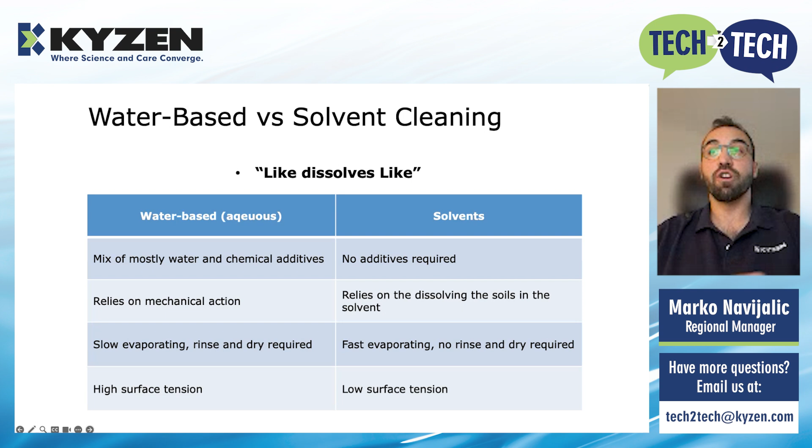Aqueous products are also much slower at evaporating. This means that your solvent process, in most cases, will eliminate the need for a thorough rinse and drying process after the cleaning, which are always a big part of the water-based cleaning process. And a very important property of solvents is that they have a much lower surface tension. This enables them to much more easily penetrate into small crevices and gaps, making them very useful in cleaning very complex products with small pitches and very low stand-off heights.

Because solvents are much more effective and rely mostly on chemically dissolving your soils, all the other factors like time, temperature, and mechanical energy will be of much less significance than in a water-based process. This will in turn result in a much faster and simpler process, and because saving time and money is your goal, that is what you want.

Stencil printing is a critical step in the electronic assembly process, and it has been reported that around 64%, or sometimes even up to 80%, of the defects in the electronic assembly process are caused by the stencil printing process. That's the reason why under-stencil wiping has gained increased interest over the last several years. Here you can see typical steps for this process. I won't go into much detail. For this, I would highly suggest you check out our other Tech to Tech series, specifically on under-stencil cleaning.

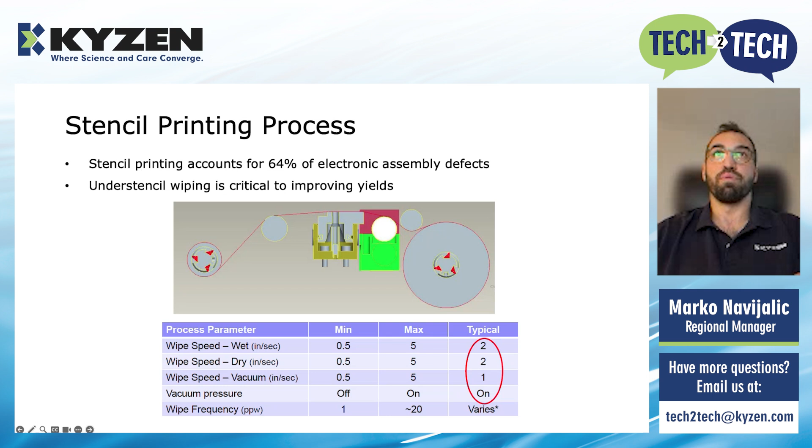But in this presentation, I wanted to show you how choosing the right solvent for under-stencil cleaning can increase your yield and throughput. So let's compare two different solvents used for this application. Isopropyl alcohol, or IPA, is, or I should say was, the most common solvent choice when a wet wipe is used. Historically, the choice of IPA made sense because most solder flux formulations were based on it, so it was a good match to dissolve most of them.

However, nowadays, solder paste manufacturers are moving away from IPA-based fluxes for multiple reasons. In the photo below, you can clearly see that IPA is a poor match for most modern solder paste formulations, while on the right, you can see that a properly engineered solvent can fully dissolve the solder paste, which is what you want to see on your stencil.

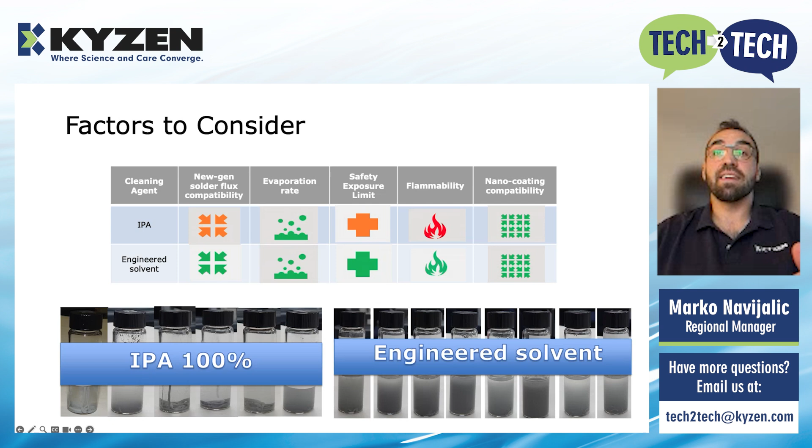Furthermore, while both of these solvents evaporate quickly, IPA does evaporate a bit faster, which actually causes problems because it increases the amount of IPA you need to use for a single wipe. It is also important to note that IPA has a flash point of just 12 C, and for our listeners across the pond, that is 54 F, which means it is flammable already at room temperature, while an engineered solvent will have a flash point much higher, usually above 60 C or 140 F, making it a much safer alternative.

So let's now do a real-world scenario comparison of both of these solvents in production and assume you have 5 SMT lines, which means 5 printers. You work 2 shifts per day and have a typical print cycle time of 60 seconds and a wipe cycle time of 30 seconds. What our testing has shown is that we typically use around 5 milliliters of IPA for each cycle compared to 2 milliliters for a properly engineered solvent.

Also, because of the much superior cleaning of the engineered solvent, we were able to significantly decrease the wipe frequency, in this case double the amount of prints per wipe you can do, which will have a big effect on your production throughput. By using the correct solvent, we were able to increase your yield from 85 to almost 95%. This will cause your number of defects to decrease significantly. And furthermore, we have also increased the number of prints per year by 17,000 per line.

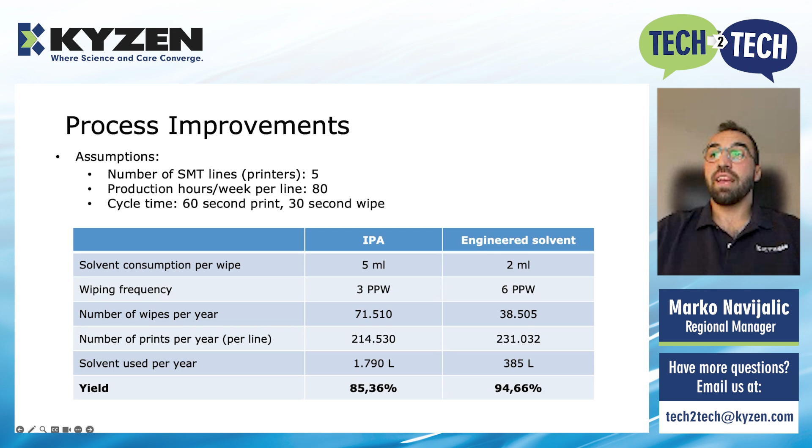And what you can also see from these results is that the total amount of wipes per year has been reduced. This in turn will save you a lot of money on the consumption of both the solvent and paper. So it's easy to see here how the right solvent was able to increase your productivity, increase your yield, and also save you money and time.

So what is our next cleaning task, you might ask? Well, of course, cleaning the flux residues which remain after the reflow soldering process. Typically, we use a water-based product for this application, but let's have a look at how solvents can be used as a safer and faster alternative for this application. This is a process called vapor degreasing. So let's just get into the basics of how a vapor degreaser works.

So here is a typical two-sump vapor degreaser, which you'll see most often on the market today. Typically, you will lower the parts into the boil sump where the cleaning is taking place. And then for the rinse step, you go into the cleaner and slightly cooler rinse section, where you can also have some ultrasonics or spray under immersion. And then you go back into the vapor zone to get your final pure rinse. Lastly, you will raise the boards through the freeboard zone for your final drying step.

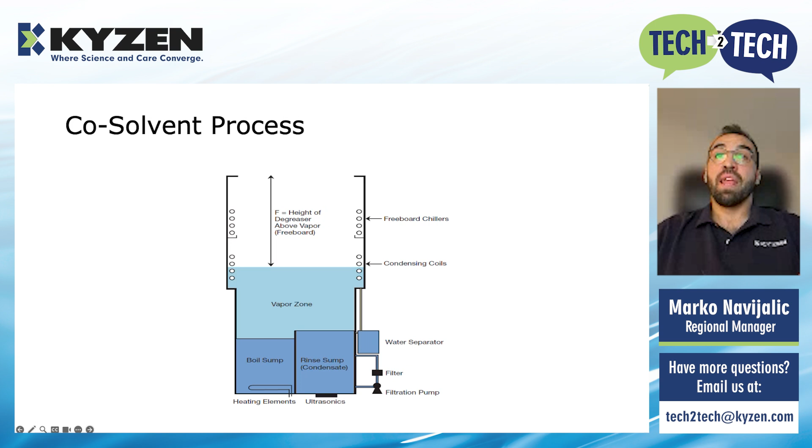If you want to know more about this process in particular, I would suggest you check out our Tech-to-Tech series on vapor degreasing. Generally, solvents used in this process will have no problems cleaning mostly rosin and RMA fluxes. However, with all the different no-clean flux formulations today, they can have trouble dissolving some of them. That's why we have developed a special DuoSolvent process in order to be able to clean most, if not all, of the modern fluxes while still maintaining a waterless process.

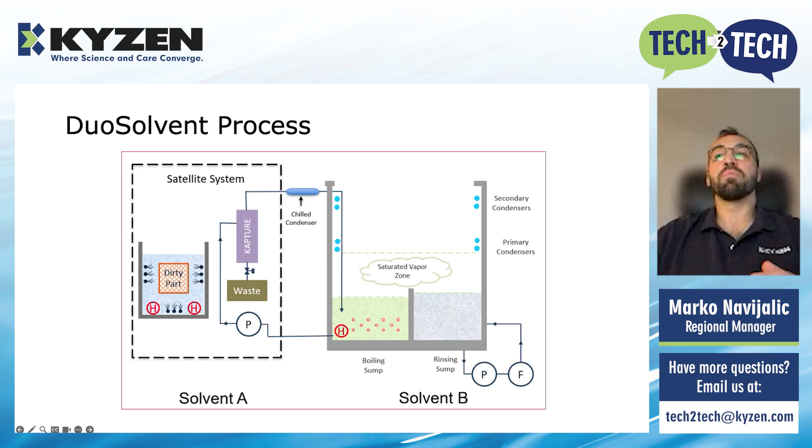This process includes a separate first step of cleaning in a different solvating agent. The biggest advantage here is that you can choose between a variety of solvents in the first step, depending on the flux you are cleaning. And in the future, if you change the solder paste or the flux you are cleaning, you don't need to worry because you can also change the solvent in the first step without affecting the process in any way. The rinse solvent in the vapor degreasing step will always stay the same. And this will give you a lot more freedom and future-proof your cleaning process.

So how can solvent cleaning improve your productivity and increase yield in this application? First of all, by removing the need for any DI water rinsing and then drying that water, this process is much faster than a standard aqueous batch process. Typically, we're talking about a total cycle time of 10 to 15 minutes for vapor degreasing, which compared to the water-based cleaning of 45 to 60 minutes will increase your production time significantly.

Bath life is also much longer with solvents. While water-based products can typically hold up about 2 to 5% of the soil, which we call NVR or non-volatile residue, solvents can last for much longer, sometimes even up to 20% of NVR.

Additionally, solvents have an advantage that they can be distilled, which means that they can be reused again and again for a much longer time. This will give you higher yields, as your cleaning result will be affected much less by a contaminated bath.

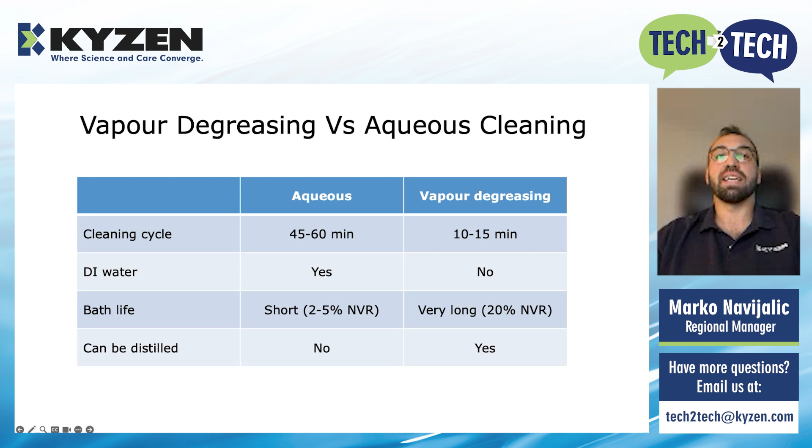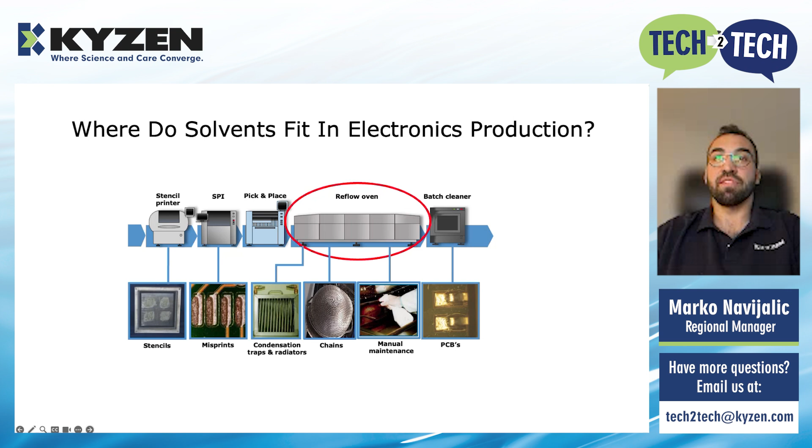So where else can we use solvents in our SMT production? What about the process where you have the most heat, flux, dust, and other contaminations? I'm talking, of course, about your reflow oven and maintaining it. So, for example, take a look at this dirty oven. Can you imagine your boards passing through it and not getting contaminated?

By using solvents to properly clean and maintain your oven, you will significantly improve your machine performance and life. This will reduce the potential for relocating the contamination from flux and other soils from dropping onto your assembly. Since this is, after all, a manual process without any heat, rinse, or dry, solvents proved also here to be much more efficient than water-based products. As a result, less downtime and improved performance will give you better yields.

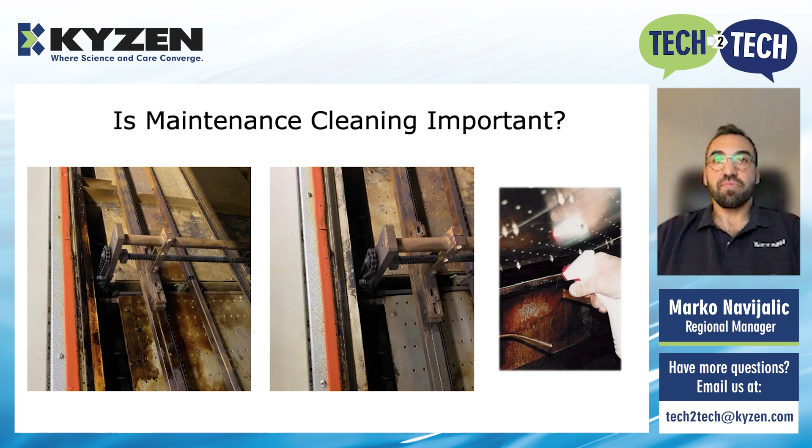So to recap what we learned today, using solvents instead of aqueous cleaning will give you a simpler and faster process, which has better compatibility with your substrates, and also you will be able to penetrate and clean your highly complex parts. In stencil cleaning, a proper solvent will give you much higher yields and faster production times by reducing the number of wipes needed and reducing consumption.

In PCB cleaning, that will also give you a faster cycle time and a more consistent cleaning result throughout the life of your bath, which will be much longer than that of a water-based process. And lastly, by using solvents and maintaining your soldering ovens, you will be able to increase their performance and significantly reduce downtime, which in turn will provide you with higher yields.

So here are some frequently asked questions about this topic. Aren't solvents flammable and therefore dangerous to use in production? Some solvents are indeed flammable, and we strongly discourage from using these products for your cleaning applications. This includes IPA because it has a flash point of 12C, remember, which means it is very dangerous and not safe to use. However, most manufacturers design modern solvents today to be non-flammable and to have a much higher flash point, making them safe to use in your normal operating conditions. As a general rule, you should always look for solvents with flash points above 60C.